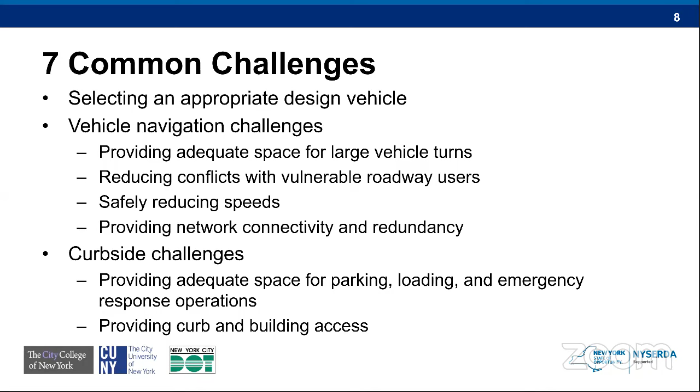What often gets lost, however, and this is something where possibly over the last couple of weeks or a couple of months around the world the view has changed a little bit. But if we think about freight in another way, first, before we get to the freight side, what are the elements of a livable city? So when we think of a livable city, we want a city where people of all ages and abilities have access to affordable and safe housing, to employment opportunities in a variety of sectors, to education, to healthcare, to basic sanitation, and to the everyday necessities that allow us to maintain a basic quality of life.

On top of that, we want access to cultural and social and recreational opportunities, which enrich our lives. And we want our communities to be able to access all of these things via a variety of modes of transportation. Now, let's break it down and look at which of these elements can actually function without goods movement.

So first, it will be very difficult to build and maintain a housing stock without the ability to move construction materials. It would be very difficult to operate a school without books and food for the students, a hospital without medicine and equipment, basic sanitation without the movement of waste out of the community.

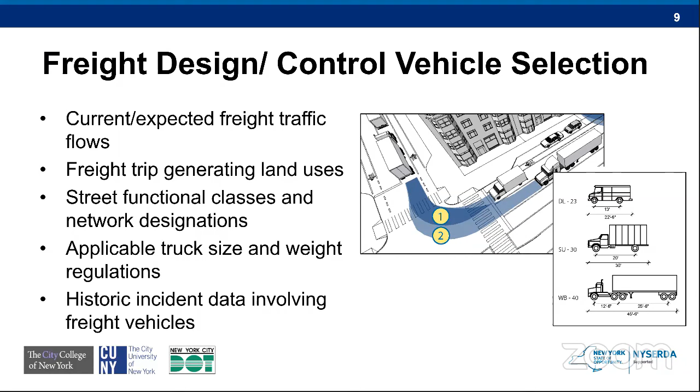So the guidebook was developed in an urban center. As I go through this, you're going to see a lot of pictures of Manhattan. I realize many of you are living in communities that do not look like Manhattan. But we found from our survey across all of those US cities that cities of varying sizes, from the very dense to even relatively limited density, are facing the same challenges.

And so this guidebook is not only applicable in dense urban centers, but it's useful in suburban or even exurban areas where you've got freight, warehousing, and industrial development, in suburban or small town main streets or even rural main streets, and in industrial and commercial campuses where you may have people moving to their jobs via transit or on bike or by walking in an area where you're going to have a lot of freight activity.

So just to outline the challenges that we're going to go through in a little bit more detail, the first is simply identifying what freight vehicles are actually operating on a street and what freight vehicles need to be designed for when we think about designing and planning a street. The second set of challenges are what I classify as vehicle navigation challenges. These are issues that freight vehicles face as they try to move through a community, as they try to navigate compact intersections, as they try to stay on a specific network.

And then finally, I've got a group of challenges which I call curbside challenges. That's once the freight vehicle actually reaches its destination, what challenges might it face in completing a movement of goods from the curbside into a final destination like a building.

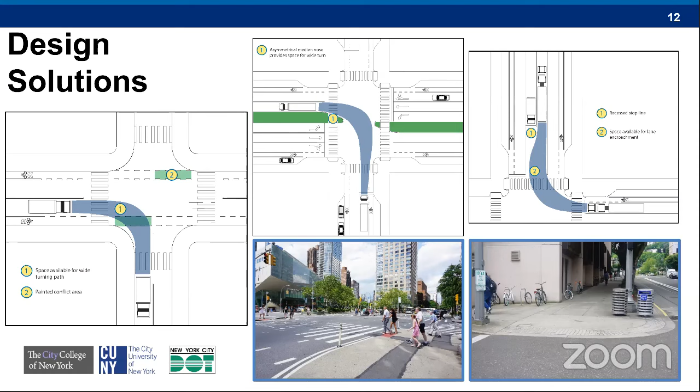One other challenge to identifying truck activity on the street is the fact that the freight industry is often not going to be present during typical community outreach activities. So often when we're doing a street redesign project, for example, putting in a bus lane or a bike lane, what we do is we take that project to a community through a community board meeting or through a local church or a local business where we know that we can bring in a wide variety of members of the community to provide feedback on that project. Freight is not local. So often the people that are delivering to that neighborhood do not live in that neighborhood. And so when we do community outreach in that way, we're not going to get at freight stakeholders that are actually conducting freight activity in the neighborhood. So there need to be specific outreach activities to engage the freight community.

And so these are just some examples. I'm not going to read through all of these in detail. I recommend that you look at my last slide. We've got a link to our guidebook, which will go through these in a little bit more detail, and point you to some really good examples from around the world of how cities are actually engaging their freight communities on an ongoing basis.

So the second set of challenges are those navigation challenges. So how does freight actually navigate a city where we have compact intersections and multimodal streets? And probably the most obvious example of a problem that comes to the mind of any member of the general public is that when you have compact intersections and when you have large trucks, they are innately incompatible.

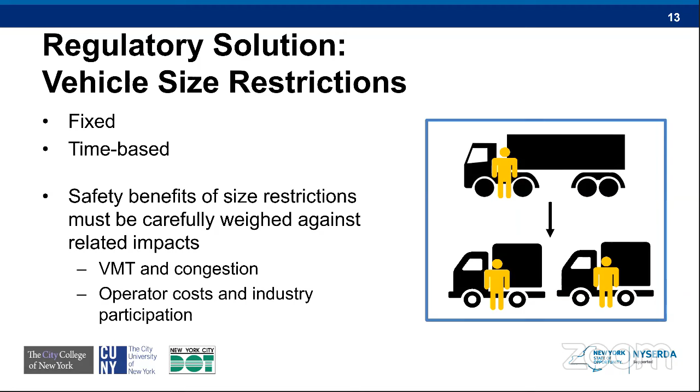So fortunately, there are a number of ways that we can actually enable those large vehicles to still operate at a compact intersection. And there are several examples of just small tweaks that can be made to the design to allow larger vehicles to operate within those compact intersections. You can see on the slide 3 examples of those.

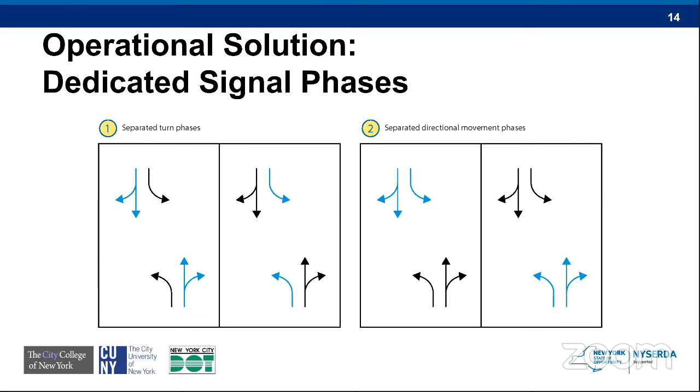So one, just simply maintaining something else at the curb other than an active travel lane. So if a vehicle does not have to navigate from immediately adjacent to the curb as it approaches that turn, it actually is going to have more space for turning. So having a curbside bike lane or a curbside parking lane or other things like a parklet in that space actually provides additional space for that vehicle to navigate the turn.

In the center, you can see an asymmetrical median nose. This is an example where if you had put a typical median here with a symmetric nose, the truck would actually not be able to navigate this turn. But just by slightly tweaking the design of that median, yes, we do lose a little bit of the sheltered space that we would get with a symmetric median nose, but we've still got some pedestrian protection, and we're enabling that larger truck to actually navigate the turn.

Finally, on the right, you see a recessed stop line. Again, these are documented not just for freight applications, but for buses and any other large vehicle navigating a compact turn. If you can move the stop line back away from the intersection, it actually can allow that vehicle to use part of the adjacent lane in order to navigate that turn.

Now, at the bottom, what you see are solutions that are using paint or allowing vehicles to actually navigate up onto what typically would require them to drive up onto a curb to actually make a turning movement.

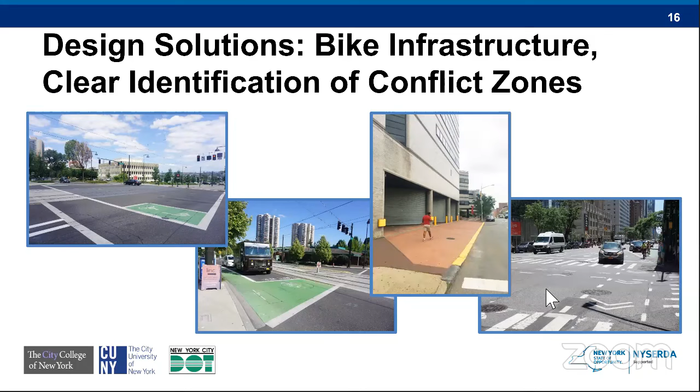So the photograph you see on the left, I think is actually a temporary treatment from here in New York City. But you can see this is a place where instead of putting a concrete curb so far, we are still taking back some of that street space and designating that as pedestrian street space, but doing so without requiring a large vehicle making that turn, that might need to navigate into that space on an occasional basis, to actually mount the curb to do so.

On the right, same thing, we've got a flush pavement. This is actually an example from Portland, Oregon. I think this is likely put in for a bus to navigate this turn as opposed to a truck. But this is where you've got an occasional vehicle that might need to navigate this compact turn.

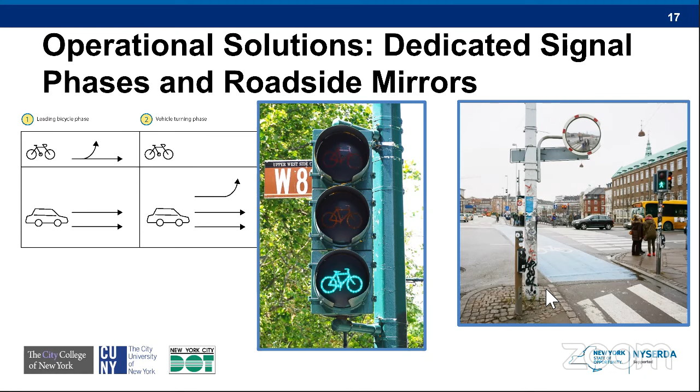It may be a better solution to allow once an hour or a couple times a day, a truck to actually cross over part of the sidewalk, which is clearly designated using pavement texturing, rather than requiring that entire intersection to be wider. So these are all design solutions that can be used to allow those large vehicles to still navigate at an intersection where we're trying to maintain that compactness for pedestrians.

We can also try to implement a regulatory solution. And again, often this is what we read is the solution. Well, the trucks are too big. We just need to limit the size of the trucks that are operating on the street. Large vehicles should not be sharing space with non-motorized travelers. And in theory, this is a true statement.

We can limit the number of large vehicles by simply putting in restrictions. However, we need to be careful in doing that, because when we do limit the size of vehicles that can operate in an area, we may be having unintended consequences for doing so. So we may limit the size of trucks that can operate at all times of day in that fixed system.

We may limit the size of trucks that can operate. For example, in Seattle, they limit the size of trucks that can operate in their business district during business hours. Again, it will limit the number of large vehicles on the road, but in doing that, we may be, for example, increasing the number of smaller trucks that are operating on the road, in which case we may get counterproductive impacts for the total vehicle miles traveled by trucks on the road. We may get increased impacts on congestion.

And probably more critically, we may also be impacting operator costs and industry willingness to actually serve an area. So if we ban certain size trucks from operating in a business district, and in doing so, we increase the cost of goods actually moving into that area, we can actually have downstream consequences on who chooses to locate their businesses in that area. And if they choose not to locate their business in that area, then there's going to be wider economic consequences for my city.

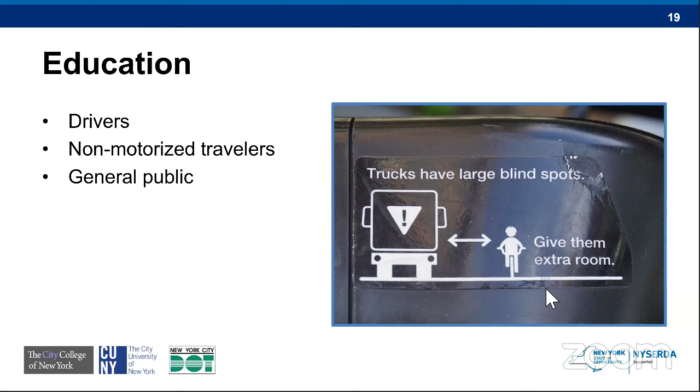Again, we can take an operational approach when we have designated phases for bikes and for pedestrians. Separating out the phasing at the intersection allows for a time for those modes to move, eliminating those conflicts. On the right, this is an example. This is actually from a bus stop in Copenhagen. This is a bus stop located adjacent to a bike lane where clearly there was a problem with the bus drivers not being able to see behind them to see an oncoming bike.

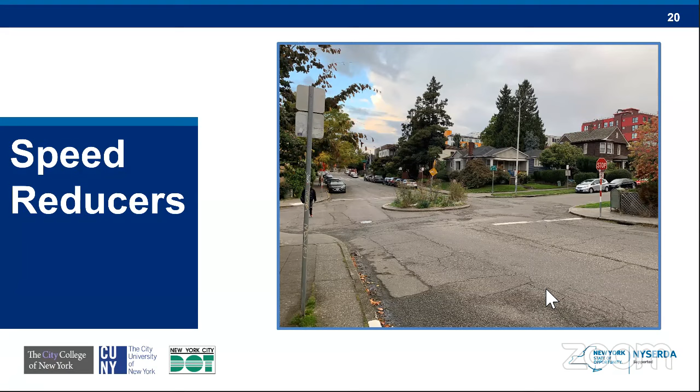These types of mirrors are not commonly used in the US. They're not in the MUTCD as an approved traffic control device, but they are commonly used in urban areas at driveway locations and other places where you might have a driver coming out of an enclosed driveway, for example, crossing a sidewalk, needing to be able to see around the turn into that sidewalk to see if there's a conflict coming. So these are all operational solutions.

And then for safety, there's a whole lot we can do on the vehicle side. So in Europe, most European countries actually have mandates for a variety of types of mirrors that see into several blind spots that a truck driver would have while navigating the streets. In the US, we do not have many mandates for these safety mirrors. In New York, we do have a requirement for crossover mirrors so that a driver driving a very large truck into essentially New York City can see if there's a pedestrian crossing in front of their vehicle, but we don't have a whole lot of mandates for these mirrors.

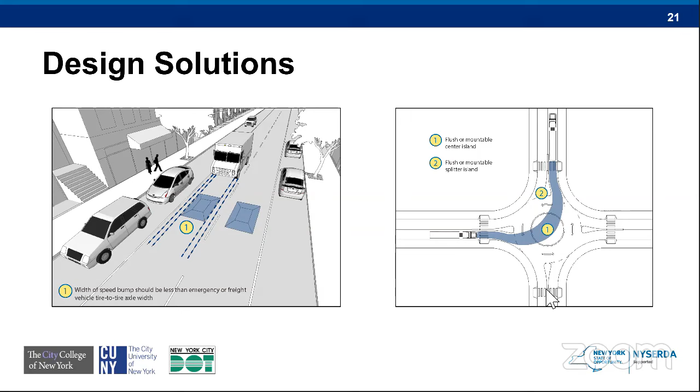Fresnel safety lenses are a very low cost solution. It's essentially a small plastic lens that you can attach to a driver's window to minimize some of those blind spots. There are more high-tech solutions like cameras and sensors that can be installed on a vehicle to detect potential conflicts coming in a blind spot.

Now the benefit of that side guard is not that it's actually going to prevent a collision from happening. What it's going to do is reduce the severity of that collision. What that side guard does is it prevents a cyclist who would collide with that truck from being pulled under the tires of the truck, which obviously would lead to a much worse outcome for the cyclist than simply, I guess, bumping into the truck as it's navigating the street.

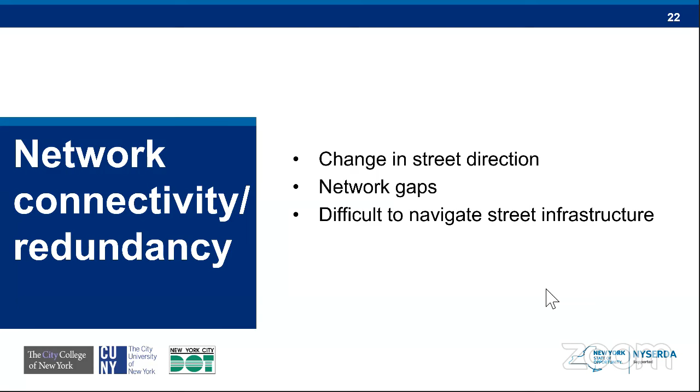I think most interestingly on the vehicle-based solution side is something that's happening in the City of London right now, which is by the end of this year, they will have implemented direct vision standards, which essentially provides a rating system for trucks based on the volume of blind spots that you would have sitting in the cab of that truck. And trucks that are designed with too much blind area will essentially not be allowed to operate on the city streets.

So why I think this is an interesting solution is it's actually taking the problem not in trying to regulate a set of trucks, but it's actually sort of bumping the problem back to the manufacturer to think about in the design of the vehicle, how can we actually better design these trucks so that those blind spots don't exist as the driver is actually navigating the street. And so that should be implemented by the end of this year and phased in with higher standards over the next 4 to 5 years.

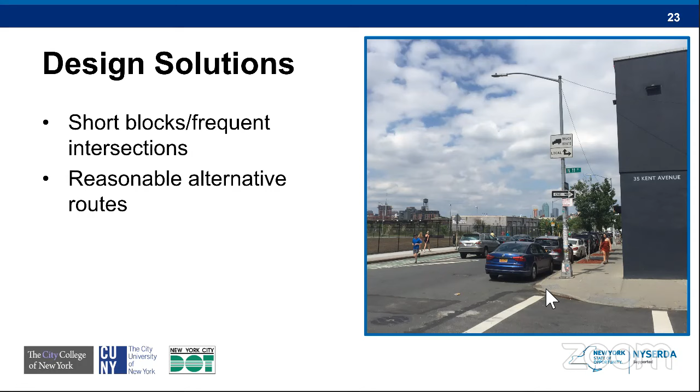On the education side for safety, there's a lot that can be done, and this can be relatively low-hanging fruit. The picture that you see is from the bike share system here in New York. These are just stickers that are on the Citi Bikes, reminding the cyclist that's actually using that bike that trucks do have blind spots and that you should provide space.

There are specific education programs. So again, an example from here in New York, as part of the Summer Streets program, New York City DOT brings a large truck to those Summer Streets events and actually allows members of the general public to climb up into the cab of the truck so that they get a better understanding of what the truck driver can actually see when they're driving that truck.

As part of the fleet operator recognition scheme in the UK, the opposite is actually done. They actually put truck drivers onto bicycles and allow them to navigate the street from the perspective of the cyclist to understand what the cyclists can see and experience. I think it's really interesting that we have both of these examples that sort of demonstrate that the real challenge is in all of the users of the street better understanding the perspective of the other users of the street so that we can eliminate as many of those conflicts as possible.

So the third challenge on the navigation side, I'm going to move through very quickly. Often the types of implementations that we put in to try to reduce speeds in a community can be problematic for large vehicles to navigate. For example, a roundabout with raised center islands and raised splitter islands might present a challenge to a large vehicle with a high center of gravity being able to navigate a circular path.

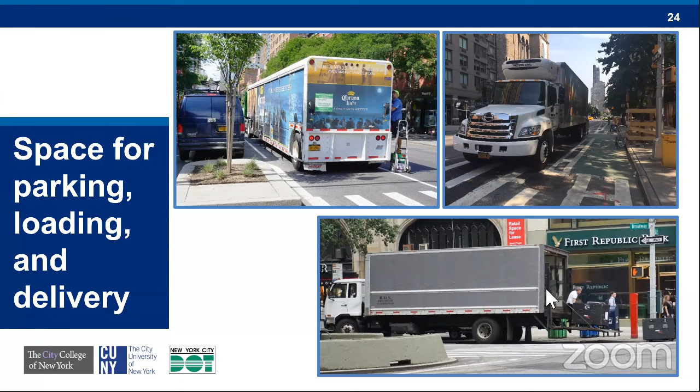Similarly, a mini roundabout with a flush center island or flush splitter islands could actually allow a truck to turn directly left over that center island so that it doesn't actually have to navigate that circular path that would present a dangerous condition to the truck driver.

So the last topic on navigability is network connectivity and redundancy. This is a little bit more difficult to define specifically, but essentially, frequently when we implement street design projects and make changes to the design of the street, it can have a network level impact on the truck network. So for example, I'll show you on the next slide a picture of a project in Brooklyn where we had a two-way truck route on which major bike infrastructure was installed.

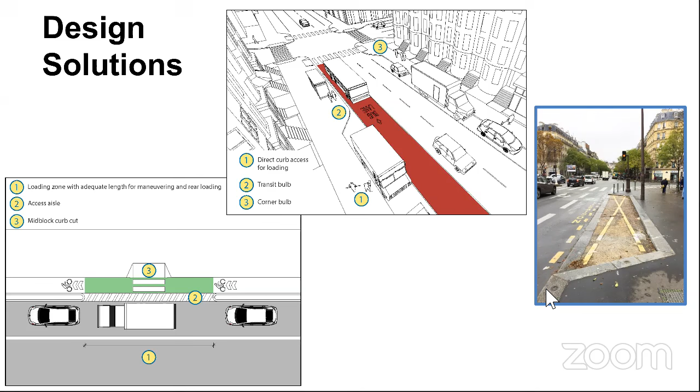So the initial design for that project actually eliminated all parking and maintained two-way traffic movements in order to make space for the bike lane. In doing so, we eliminated all loading at the curbside, which became problematic for the industrial land uses that were adjacent to that. And so the street was then redesigned again, changing that two-way truck route to a one-way truck route, which solved the initial problem that was identified. But ultimately, the new design changed that to a one-way truck route. And in doing that, it eliminated part of the defined truck route network in the city.

What happens now is drivers arrive to the north end of that location, and then they have to make a decision to stay on the legally mandated truck route and navigate a much longer path in order to stay on that truck route, or to choose to travel on streets that they're not really supposed to be traveling on as part of the truck route network and maintain a relatively shorter path. In doing that, we basically created a network level navigation problem for the trucks.

So in implementing street design projects, we just need to recognize that when we make changes to streets that are used as part of the truck route network or commonly used by trucks, we need to think about what are the alternative routes that they're actually going to use if that network piece is eliminated, and what's the impact of that going to be? Is it likely to drive trucks onto streets where there is not really a reasonable alternative, in which case they may start to operate in a way that they shouldn't in order to maintain an efficient route? Or if they do use the legal route, are we increasing VMT? Are we increasing risk somewhere else in the network because we're now driving up the mileage for trucks operating in our network? So just thinking about it from kind of a network perspective.

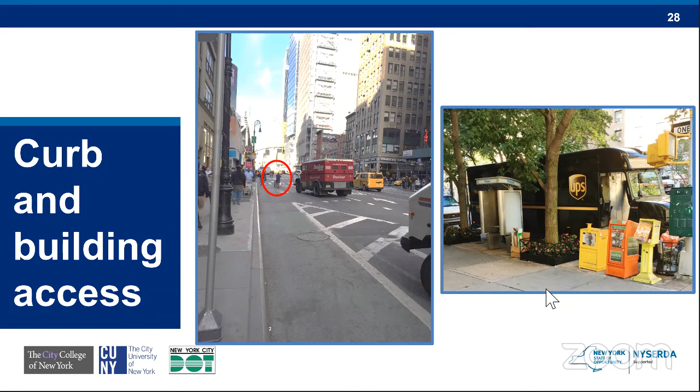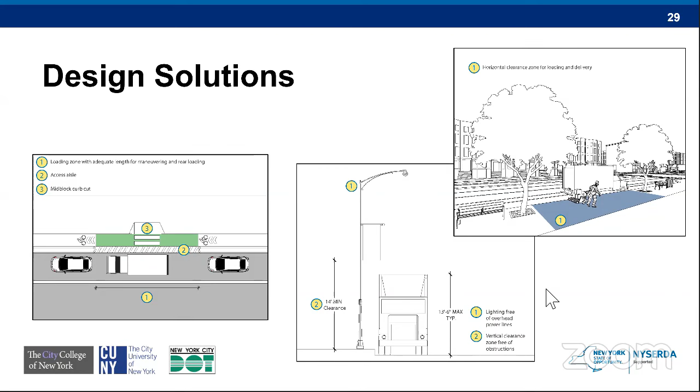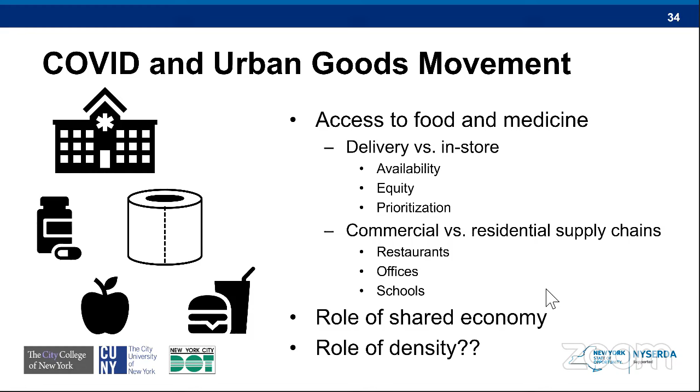First, from a supply chain perspective, the cost structure might be different. If a driver's coming in late at night instead of during the day, you may have to pay them a premium. The driver may also be at a safety risk making that delivery late at night when there's not people around. The business who's the receiver may actually have to pay staff costs for someone to accept that off-hour delivery. Now, there are definitely technology solutions and other solutions where we can get at some of these challenges, but they're not going to fix themselves. They're issues that we need to think through.

And then from the neighborhood, we don't want to have trucks outside of our apartment at 4 o'clock in the morning, waking us up at night. So we need to think about that. Similarly, consolidation centers are often viewed as a good solution. And again, there are very good examples around the world where they have worked. That's where we bring goods in on a large vehicle, transfer them to smaller vehicles that are more friendly to these multimodal streets for final delivery.

These can be effective, but they are very difficult to make work economically. So if a vehicle is efficiently moving a large volume of goods, and we now take that and put it onto smaller vehicles, we're increasing the cost to actually move those goods. That may be a cost that we're willing to bear, but it's a cost that we need to think about.

And then finally, lockers and pickup points are a very increasingly common solution, probably more so in the European context so far than in the US context, but it's certainly increasing around the world, where we have a secure locker bank where you can have your delivery delivered to a locker or to a local store or a pharmacy where you pick up your package at that location. Again, the benefit of this is it's densifying that demand. E-commerce is a very disaggregated demand.